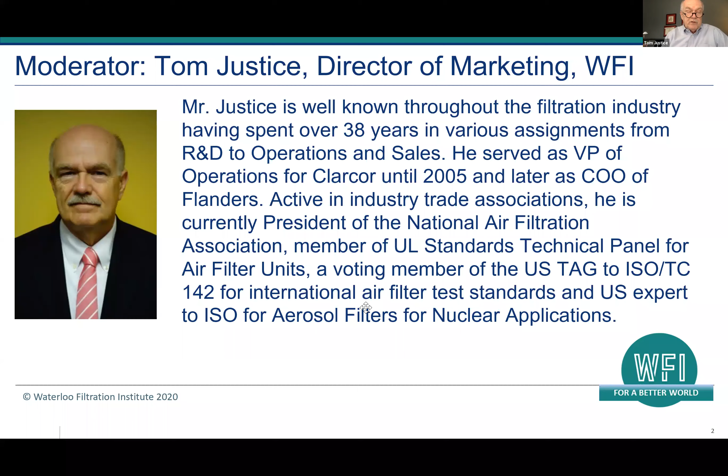We have with us on the call today 8 industry experts who are responsible for most of the content that we will see here today. They are Dr. Christine Sun with Waterloo Filtration Institute, myself, Peter Tsai, University of Tennessee, Chow Tan, University of Waterloo in Canada, Vincent Hugh, Advanced Filtration Center, TTRI in Taiwan, Eric Fu, PathEc, Australia, Dr. Gajanan Bhatt, University of Georgia, and Mr. Bob Burkhead, Blue Heaven Technologies in Louisville, Kentucky.

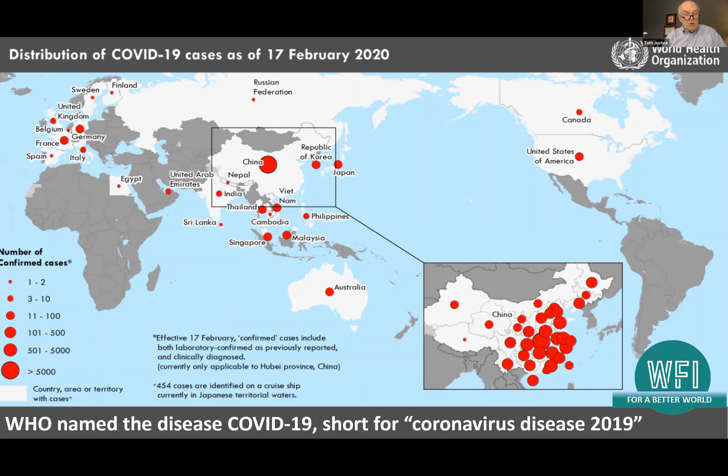So if you see here, map released by World Health Organization. On January 30th of this year, the International Health Regulations Emergency Committee of the World Health Organization declared the outbreak a public health emergency of international concern. As of yesterday, 71,429 persons in 25 countries were infected and 1,725 deaths were reported according to the World Health Organization, who officially named the disease COVID-19, short for Coronavirus Disease 2019. Next slide.

So there are already reports of face mask shortages around the world. According to MacIntyre and Chughtai at the University of New South Wales, there is a concern that panic buying in countries where the risk of catching the virus is low could result in a shortage of supplies which might not be available when we need them most. It's particularly important that we supply our healthcare workers with the best protection possible as they're on the front lines, between us and the epidemic. UNSW also pointed out that during the SARS epidemic, 21% of all cases globally were healthcare workers.

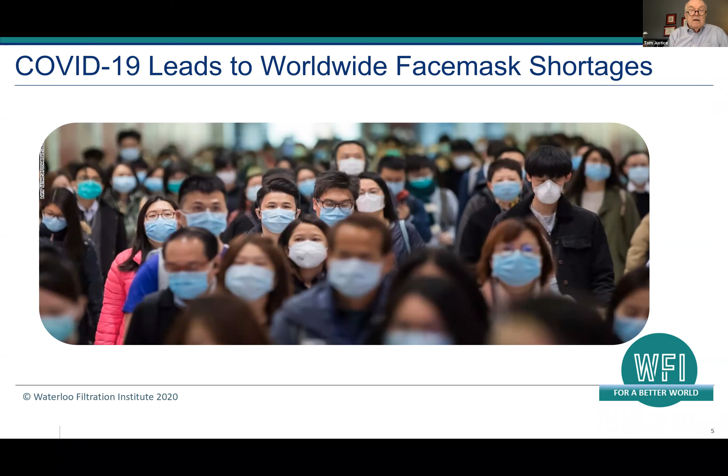So what we're going to touch on today with the panelists, some of the key points: what type of face mask should I be wearing to protect me from coronavirus? What type of rating should I be looking for? Does it provide me with 100% protection, 95% protection, or what? How long can I use it? Can I reuse it?

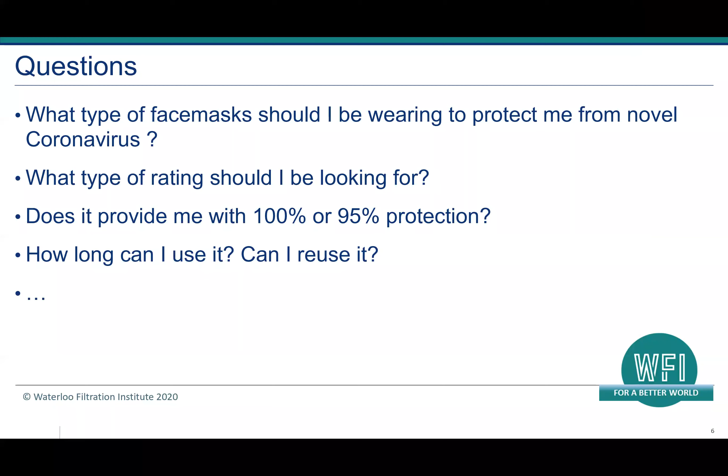And so leading off the discussion, we have Dr. Christine Sun, president of WFI. Dr. Sun is a globally renowned expert and leader in the filtration industry with over 30 years experience in academia and industry. She is past chair of American Filtration and Separations Society and is currently operations chair of the 13th World Filtration Congress, which will be held April 20 through 24th of this year in San Diego, California. She received the AFS Fellow Award in 2019. So Dr. Sun, I will turn it over to you.

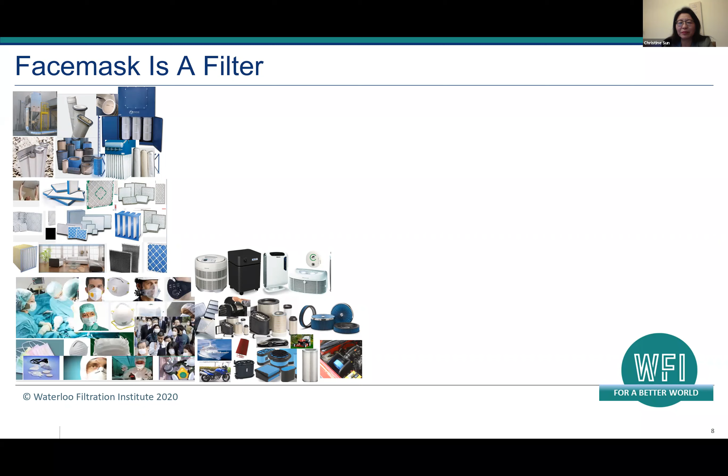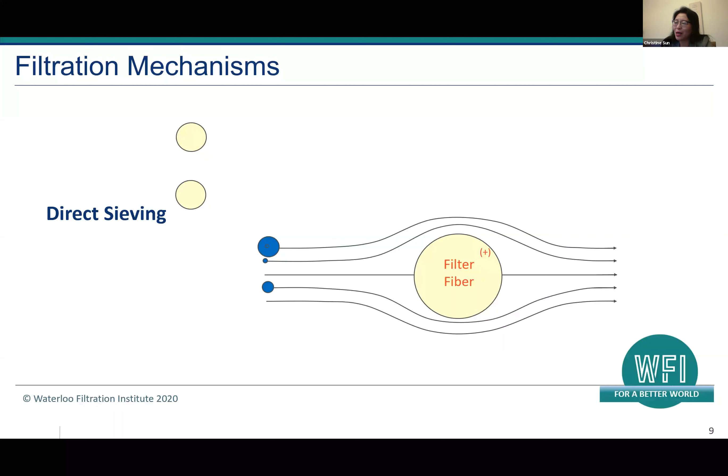There are two primary mechanisms for air filtration. One is called direct sieving, and the other is called indirect interception. For direct sieving, the particles are too large to pass through the pores of the filter medium and are captured.

The most common mechanism for filtration today in air filtration is indirect interception, which is contributed by Brownian diffusion, as you just see on the screen, for very small particles. And the other one is called interception, that's for particles not too big, not too small, which can flow through the airstream and be captured when they touch fibers.

And for the larger particles, when they flow through the airstream, they're deviated from the airstream by gravity or inertia and captured when they touch a fiber. And the last one we call electric attraction or electrostatic charging attraction. Very small particles are captured by electricity, either the charge on the fibers or the charge on the particles.

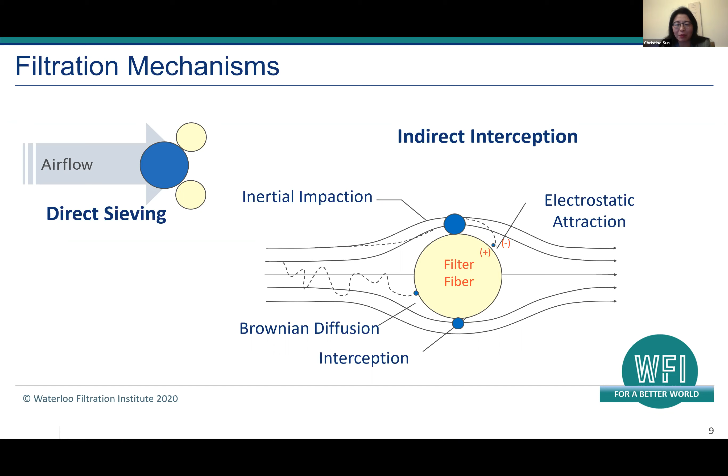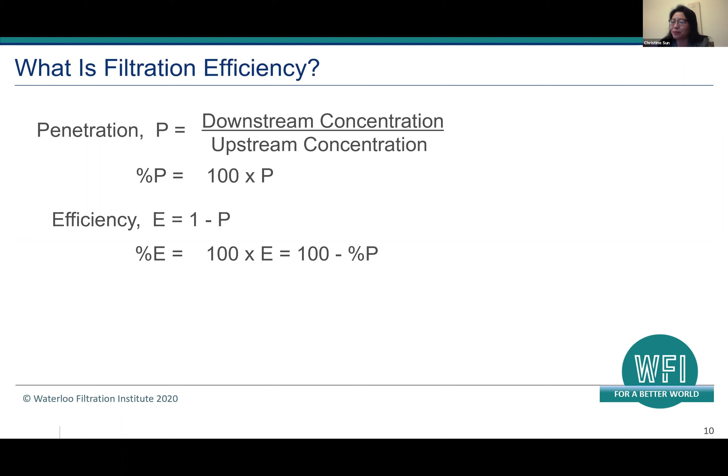So what does it mean by N95 masks? Up to now, you probably think it has to relate to filtration efficiency. If you are not sure what it exactly means, don't worry, you will know that shortly.

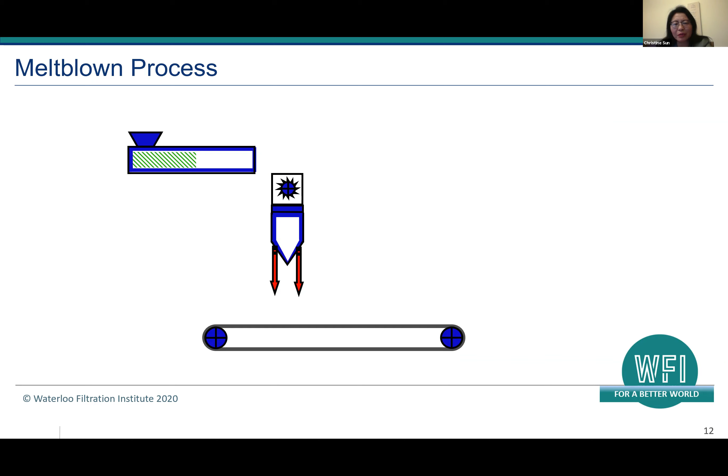For people who are not familiar with the melt-blown process, this cartoon explains how it works. It is one step to make fabric from polymer resin. Polymer resin is added to the extruder, heated up, and extruded to the spinning die. And the filaments extruded are instantly attenuated by hot high-velocity air to micro scale fiber diameter, which forms the web directly on the belt by self-thermal adhesion.

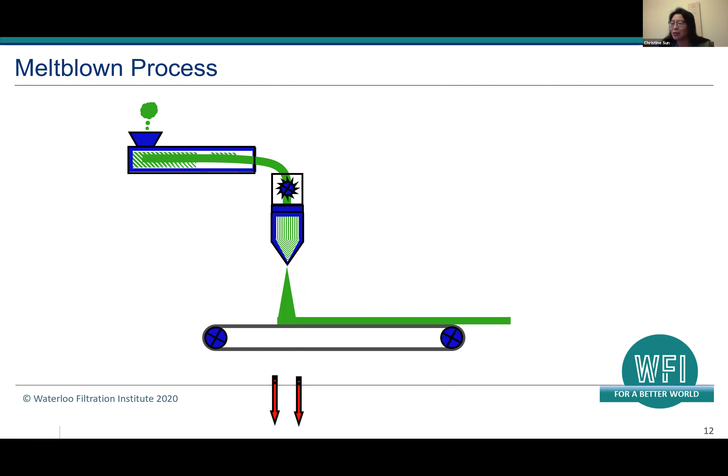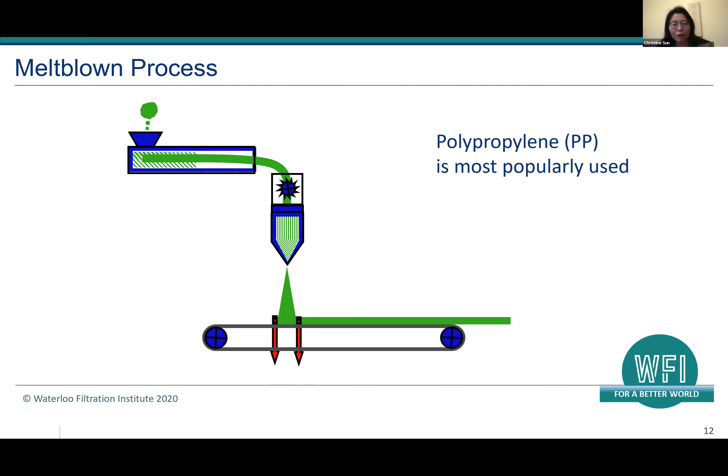Polypropylene is the most popular resin for the melt-blown process, and electret charged polypropylene nonwovens are most widely used for face masks on the marketplace. Besides melt-blown technologies, you can find new developments primarily in nanofiber technologies and some other technologies such as membranes.

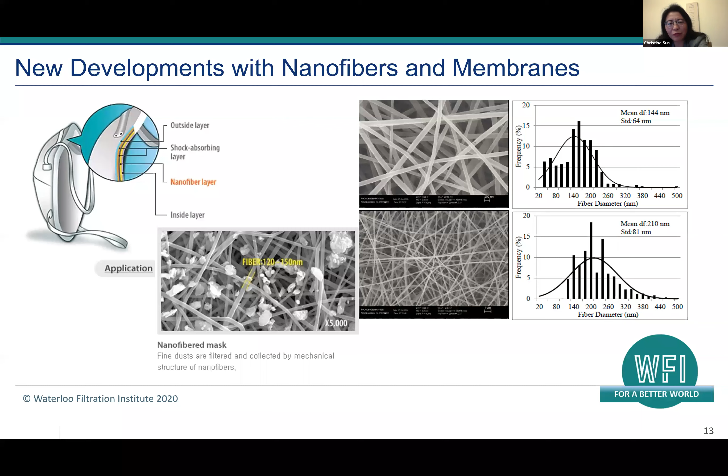So let's take a look at what types of masks we're talking about that have protection against COVID-19. First, please be aware, we are not talking about regular dust face masks. We're talking about face masks that have protection against submicron particles. Primarily, there are 4 types: medical mask, N95 mask, APR, air purifying respirator, and PAPR, powered air purifying respirator.

You can see the actual product examples on this slide. And each category requires different filtration performance, or we can call it a protection level. Medical masks require bacterial filtration efficiency minimum 95%, particulate filtration efficiency minimum 95% at 0.1 micron.

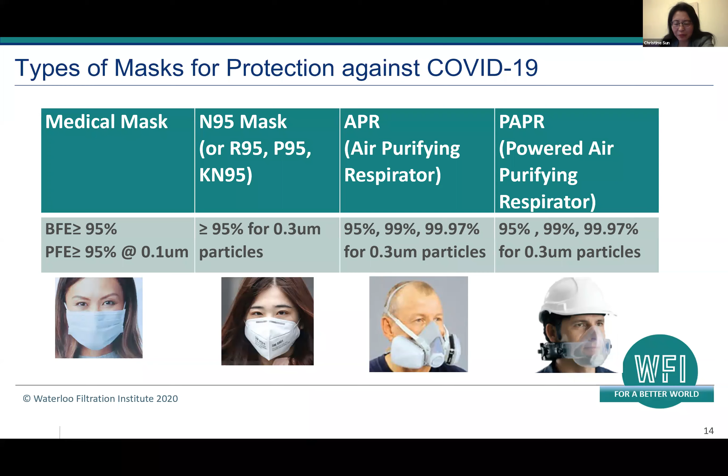We have standards to address different types of face masks we use. Medical masks need to be cleared by FDA via 510(k) submission based on standard ASTM F2100. Realize that this is not a single test method. It includes multiple test standards, such as particulate filtration efficiency, bacterial filtration efficiency, and blood penetration test. N95, APR, and PAPR products have to be certified by NIOSH under 42 CFR 84.

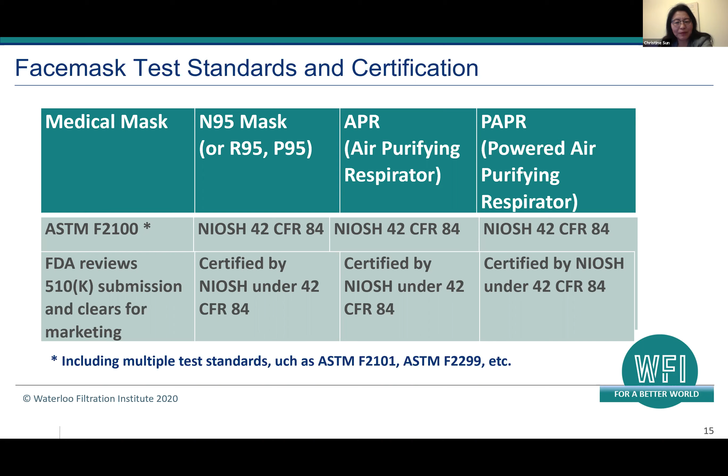Does the face mask really provide the efficiency when people wear it? In other words, we received a lot of questions: can we really rely on face masks to prevent COVID-19?

Professor Tan of University of Waterloo has done some very interesting work. Professor Tan is the Associate Dean of Engineering, University of Waterloo. He is also an Executive Director of the Tsinghua University–University of Waterloo Joint Research Center for Micro/Nano, Energy and Environmental Technologies. Next, he will share his research to help answer your questions and understand what you can do more effectively to protect yourself from COVID-19.

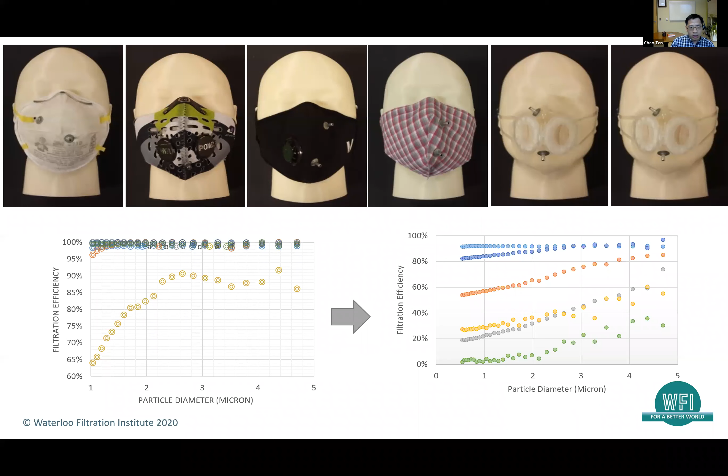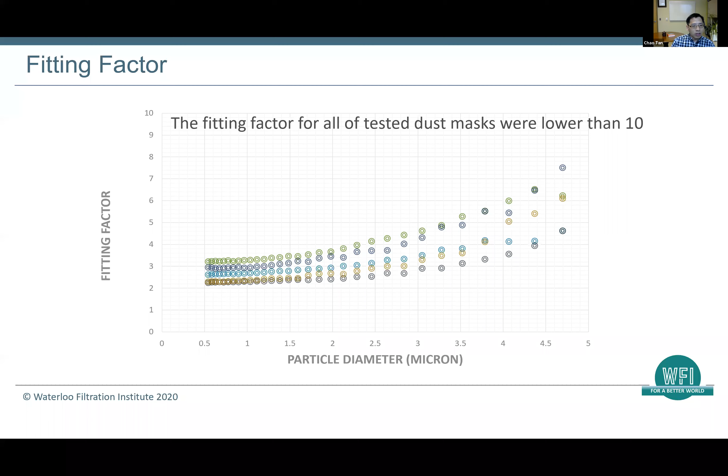And we calculated their fitting factors. Actually, none of them meet the standard, which requires a fitting factor of 10 and above; all of them are below 10 for all the particle sizes tested. Next, please. We also compared how they perform when they're mounted on different heads. As you can see, for the same type of dust mask mounted on different heads, their performance is actually different. There's no indication of the color, but the shape matters most. Next.

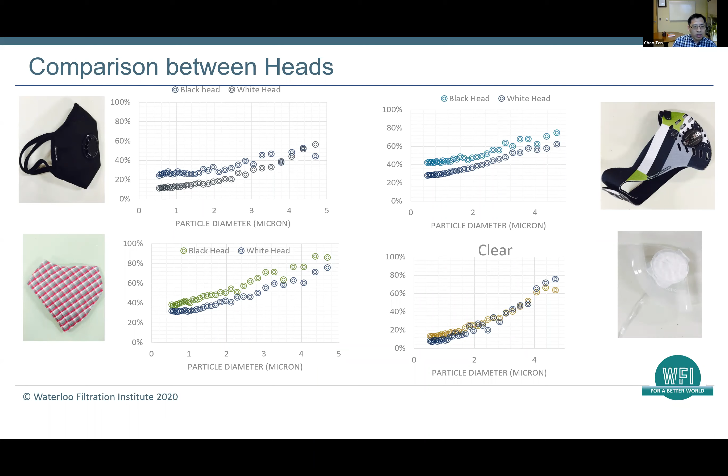As one example, I want to show you how sealing affects the performance. This is one of many test results. As a typical example, without sealing the edges onto the mannequin face, the efficiency was very low, but when you seal it with duct tape, you can see it brings the efficiency up to a pretty high level. Although it's not 95% yet, that matters a lot. That's pretty much the conclusion we can get.

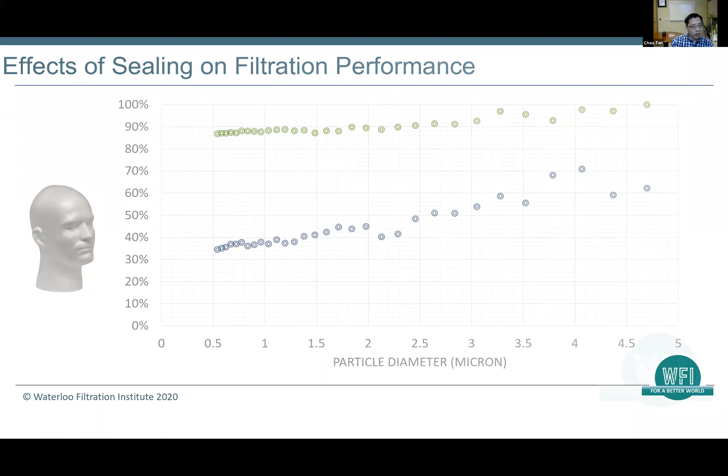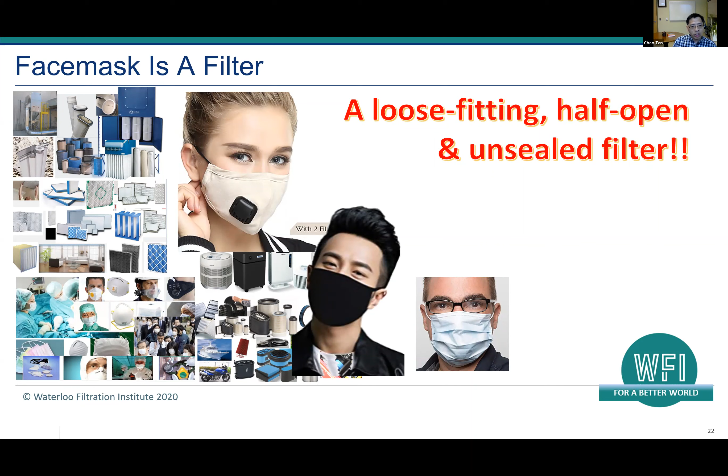With this simple test, you can see that a face mask is a filter. The filter media may work very well, but it really depends on how you wear it, on the shape of your face or your head, and how it is sealed onto the face.

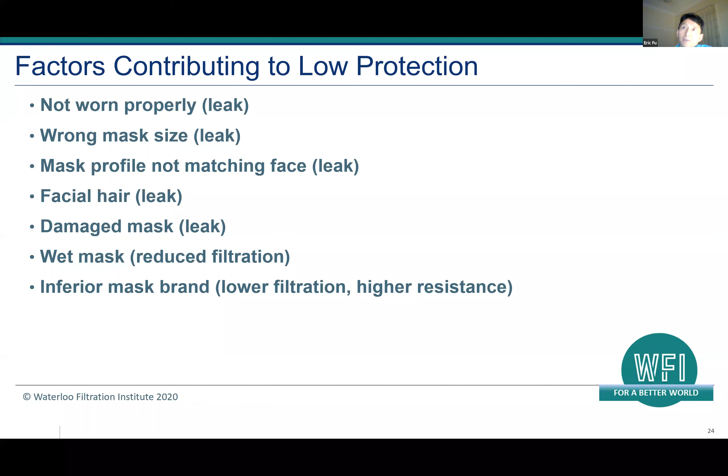So the first two suggestions to ensure good protection are, firstly, hospitals need to establish training programs for all healthcare workers to correctly select and use proper masks.

For example, when to use surgical masks or when to use N95 masks, how to wear them properly. Secondly, if you use N95 or better grade masks, make sure to conduct fit testing to ensure the factors that may compromise protection are discovered and mitigated. For example, the test can show you which mask type and which brand work and does not work for you, and will also give you a good idea about how to wear it properly to get a good protection.

Then after this, if you want to still have a better protection than paper mask, you can consider to use an elastomeric face mask, or called APR, because the elastic cushion of the mask tends to give you a better seal than the paper mask does. And for even better protection, you can consider to use a powered respirator, or PAPR, because the positive pressure in the respirator can give you a better protection and comfort.

Having said that, both APR and PAPR require effective cleaning and sterilization procedures to be reusable. And these procedures need to be established and trained before using these respirators. Now I give you two quick examples for fit testing. One is using a qualitative test kit from 3M, and during the test, you wear the mask, you try to test for fitting. There's a bottle of chemical with a bitter taste, which will be sprayed around you. If you can't taste any bitterness, it means you have a good fit with the mask. And if you can, then the fit is bad.

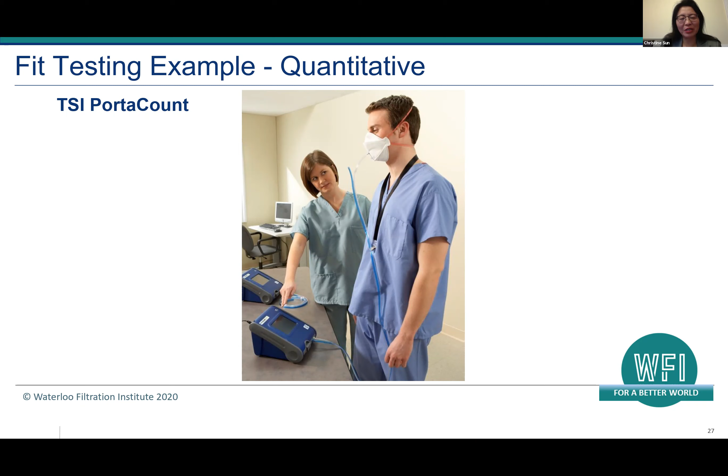Thank you, Eric. We receive a lot of questions on this face mask. People actually ask questions like how the charge can stay in the face mask, and what's the life for it to be reusable. And some of the questions are pretty much directly related to electrostatic charge. And we are very glad to have Dr. Peter Tsai live right now, and he will guide us through the basics of electret technologies with meltblown nonwovens and some of the interesting data. So Peter, I turn the microphone to you.

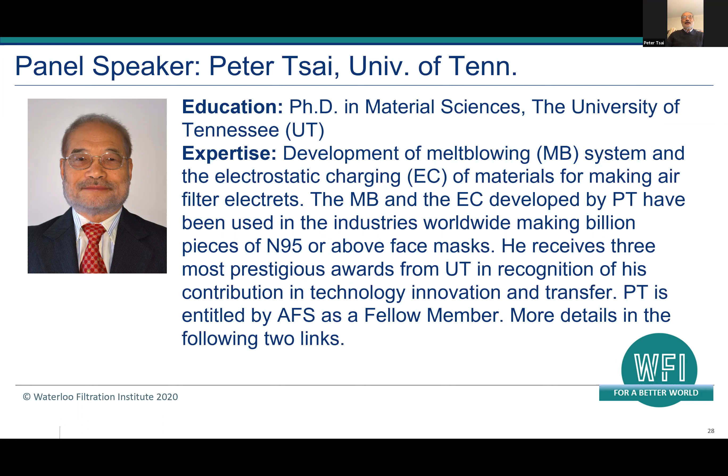Thank you for the introduction. Can you hear me? Hello? Yes. Yes. Okay, good.

So I'm going to talk about the electret. You know, there are a variety of face masks. Medical face masks and N95 respirators are the two most commonly used face masks for protection against bacteria and viruses. The filter layer in either one is a charged meltblown polypropylene fabric. Usually, a medical face mask is composed of one ply of the filter media and two plies for N95. The charged media is called electret. They are made from the electrostatic charging of the material. Three basic ways to do the charging: corona charging, triboelectrification, and polarization. Electret for masks is made by corona charging.

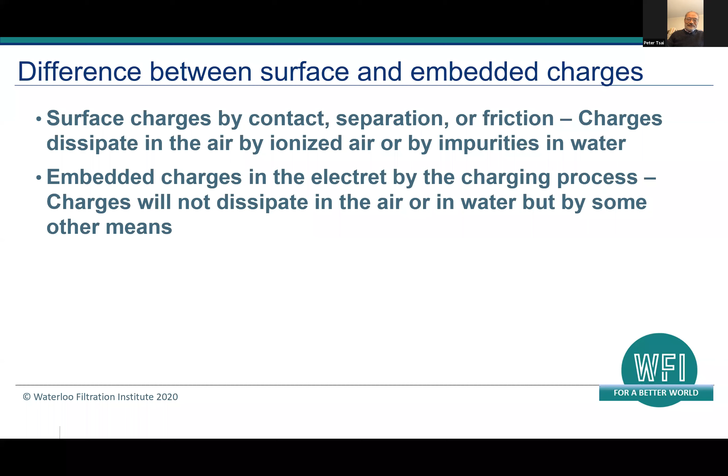Next, please. The charge is on the surface of the material. For example, clothing we encounter in our daily life has surface charges. These surface charges will dissipate in the air by the naturally ionized air and by the impurities in water. But the charges in the corona charged fabric will not dissipate in the air or in water because they are embedded deep inside the fibers, and the PP material is hydrophobic. The charges are not affected by the humidity in the air. Next, please. Next slide, please. The electret. Sorry, back.

The electret will have a quiescent charge decay in shelf storage due to the heat capacity in the air. The higher the temperature, the faster the decay rate. It will have the charge decay by particle loading. The decay rate depends on the particle types.

The decay rate is slow by solid particles, for example, by sodium chloride. And it is also slow by liquid particles, such as water droplets. But in terms of oily particles, the decay rate is very fast by DOP, that is dioctyl phthalate, because DOP is a plasticizer, but the decay rate is not that fast by paraffin oil particles.

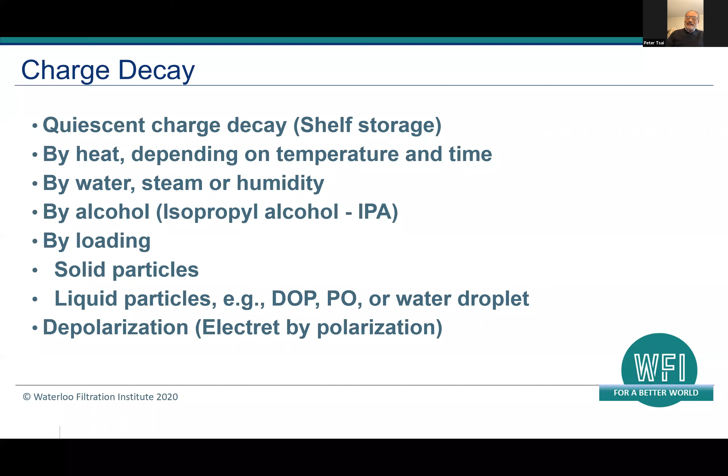Alcohol will erase the charges because alcohol wets out the PP material due to its lower surface tension than PP. Therefore, alcohol needs to be avoided to sterilize the electrets. Next, please.

These 5 years at room temperature is the guaranteed temperature and the storage time for face masks, including medical face masks and N95.

So charge will decay in the air, but very slow. And the charges can decay very fast by oily particles. But charges will not be erased by humidity or water. So that is the efficiency of the electret and the characteristics of its charge decay.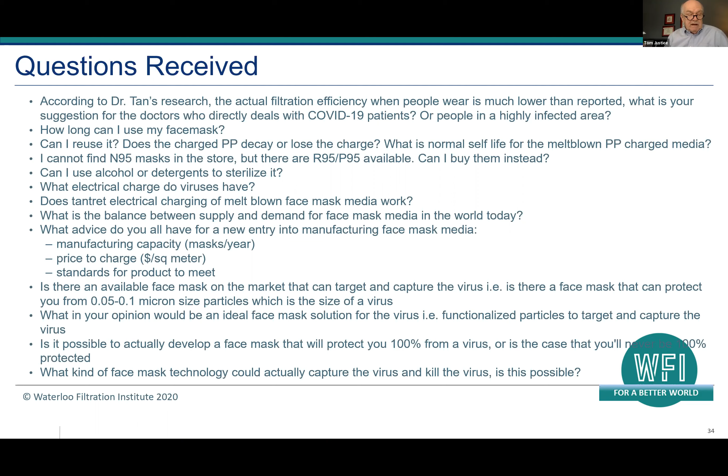So we've selected 8 questions. These were selected by the panel. We'll review these. First question is, according to Dr. Tan's research, the actual filtration efficiency when people wear is much lower than reported. What is your suggestion for the doctors who directly deal with COVID-19 patients or people in a highly infected area? And Eric, I'm going to call on you. Ask if you'll address that, please.

Yes, so this is the question I just answered actually in my talk just now. So let me just go direct to the second question. Right. Let's go to the second question. How long can I use my face mask? Can I reuse it?

Thank you. Any other comments to that? So here the question is, Eric, probably you can help us address that. Can I reuse it? Normally, no, because this is called a disposable mask, not meant to be reused. However, in a pandemic like what we have now, if there's a mask shortage, which it is, you can reuse it to a certain degree. So for instance, if you're not using it all the time or just occasionally, and it's not damaged or contaminated, you can use it. But you should limit it to 2 or 3 days.

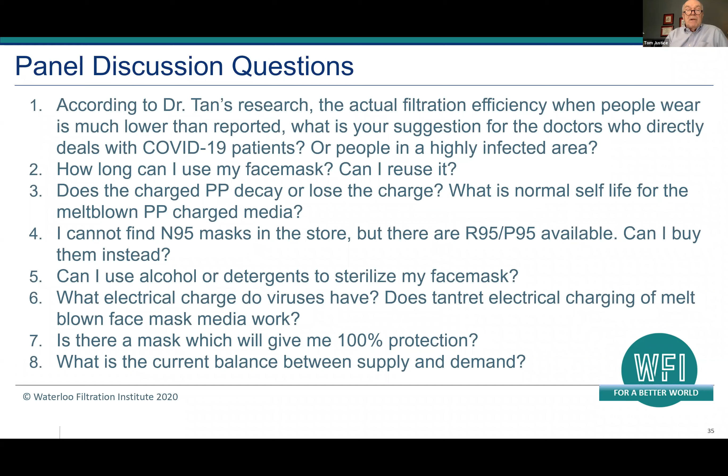Well, thank you, Tom. For the use of masks, we highly recommend you refer to WHO advice on the use of masks in the current situation.